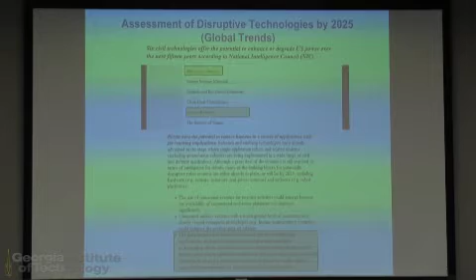I'm very excited about many things in robotics, but one of them is the reports from the National Intelligence Council that come every 5 years or so. This is a report from 2010 trying to predict the technologies in 2025, called Global Trends. At that time, there were 6 key technologies that could potentially disrupt the world, one of them being the extension of human life, biogerontechnology. There were also 3 on energy storage, clean coal technologies, biofuels, and so on.

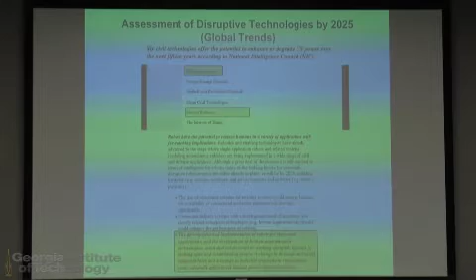But the 5th one was service robotics, in particular development and implementation of robots for elder care and human augmentation technologies, meaning robots could work alongside humans. At the same time, a change in social responsibilities and employment might occur and might be adverse to low-income workers. I think this is always the dilemma in robotics, and in any technology in general, of what the implications are going to be in the work environment. It's interesting that the Internet of Things was placed as number 6, which I'd say is nowadays more important than service robotics, but nonetheless still there.

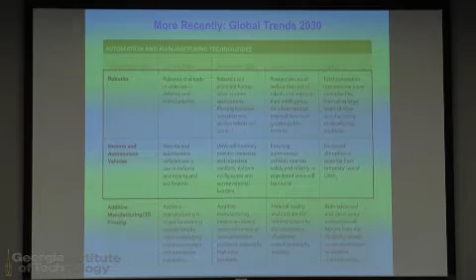This is a more recent report predicting 2030, with service robotics, manufacturing robotics, UAVs and UGVs here to stay and potentially disruptive if the FAA approves things. But we need to focus on reducing cost, increasing intelligence, and also being subject to the scrutiny of the public. That's very important, being sensitive about all of these issues.

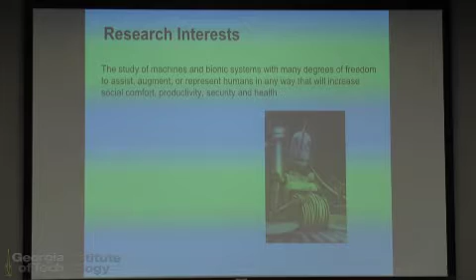...but we have these mobility problems after 70, 80, and 90, we really need to think about our lives and the lives of our children, what I'm calling 'after mobility.' What's going to be our life after mobility? I think robotics plays a very important role here. My personal research interests are the study of machines and bionic systems with many degrees of freedom, not necessarily in a humanoid form, any form, to assist, augment, or represent a human in any way that will increase comfort, productivity, security, and health.

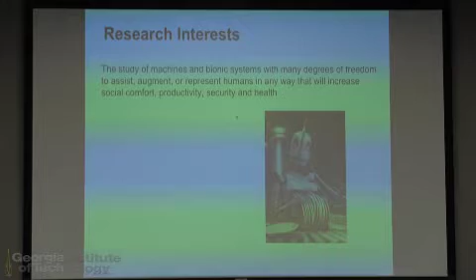This is really a way to say that robots will be blue-collar workers. Given that robotics doesn't have the metabolic requirements of humans, and perhaps we can utilize more energy and more resources, we might have more complex machines than humans, outperforming them in a physical sense.

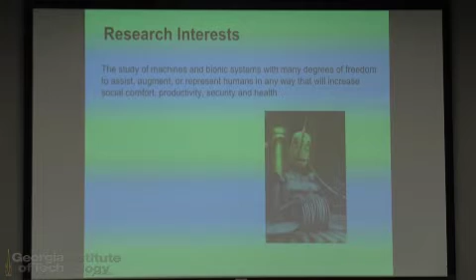Here we have such a machine, from the movie Robots, from 2005 or so. The robot has anthropomorphic degrees of freedom, but also has degrees of freedom inside. It's doing another task, washing dishes. I think that's what we're going to see: more redundancy, more mechanical complexity, and of course more smarts for the tasks that we need.

Feeling hopeful about those statements — if I knew I would succeed, borrowing a sentence from Astro Teller from Google, I would have Home Assistive Asimos. That was a view I had in 2009.

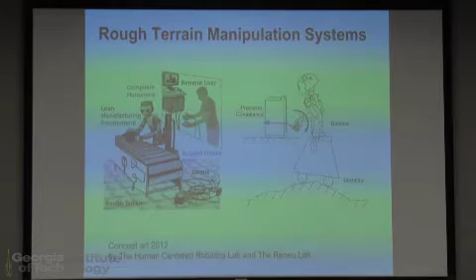I would have humanoid agile bipeds walking on alleys with children — that's a view I had in 2010. I would have rough terrain manipulation systems performing the kind of tasks they perform in factories, but now outdoors, dealing with all the uncertainty of outdoors.

I would have cloud-based humanoid laboratories where students could download applications for remote robotics, take data safely, gather it, and publish papers without having to build those systems themselves.

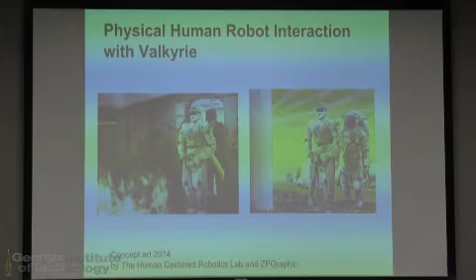I would have physical human-robot interactions with many Valkyries for firefighting and for astronaut work, and physical human-robot interaction in general. Overall, I would have robots just moving around and colliding happily with people without injuring them.

That's a more recent vision. The main thread to all of these things is the human-centeredness of these systems — the study of robotic systems for assistance and augmentation, what I call representation of humans for their comfort, productivity, security, and health, which is an elegant way to say that they should be blue-collar workers.

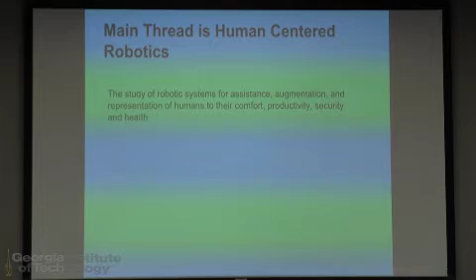So God knows what happened to Asimov's vision of crime detectives and civil rights advocates in robotics. So bring out the spirit, guys — from blue collar to advocates and detectives. That's a long haul. Within these kinds of visions, the ONR, Office of Naval Research, was the second entity to fund my laboratory.

But really the first substantial funding I got was back in 2011, so this grant is very significant for me. When I think about human-centered robots nowadays, my first reaction is to think about ONR and the Naval Research Laboratory and their great programs on predicting human movement, on grammars for planning, and so on, as well as mechanics and physical systems.

So if you are in these fields, these are phenomenal places to be. And there we play a role in the design as well as the controls of bipedal systems.

Let me give you some history of agile mobility. In particular, my interest is in speeds faster than 4 meters per second. Those have been achieved, but not as the regular mode of operation that robots at all times should perform at these speeds. I think it's a hard question to ask.

The motivation for those speeds is that humans tend to walk at 1 to 2 meters per second, but robots are there to, in a way, outperform our capabilities — doubling those speeds. In my opinion, we should be aiming for that, as well as being more metabolically efficient and lightweight.

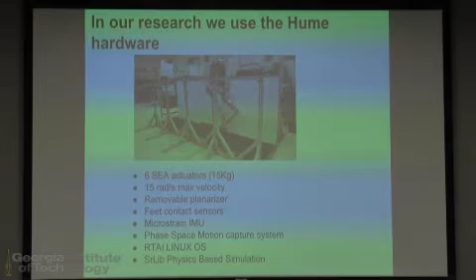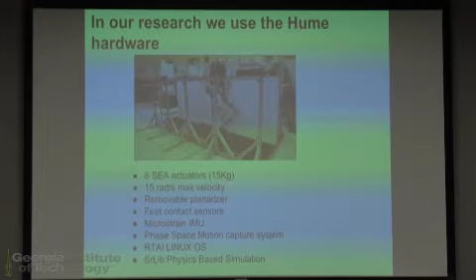In our research, we use the Hume hardware. It's a 6 degree of freedom, series elastic actuated robot, weighs 15 kilograms, fairly lightweight, can accomplish speeds up to 15 radians per second. We normally don't operate at these high speeds, and one of the reasons is because precision degrades, and point feet robots are already very sensitive to both precision and state estimation.

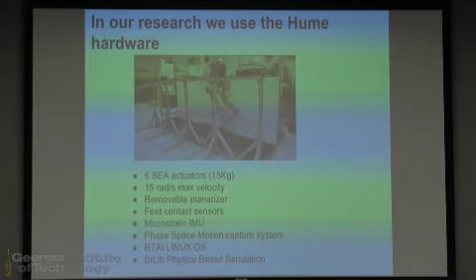We have a removable planarizer, so we are not confined to planar locomotion only. We have feet contact sensors for switching controllers and gains upon contact. We have a very low cost, bad decision in my opinion, microstrain IMU. We should have gone for the high performance one, but we augment the system with a phase-space motion capture system at 500 hertz. Obviously you suffer some occlusions and other things, so we have to do sensor fusion there.

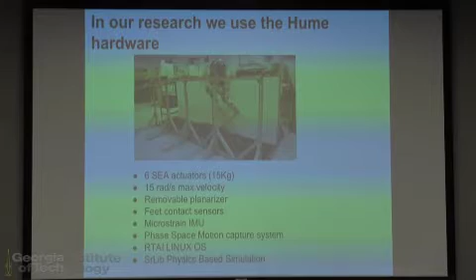We are based on Linux with a real-time kernel, and then we have simulations. The simulations are funny because a few years ago I thought I would never use simulations, and how important they are, obviously. We rely on prismatic inverted pendulum dynamics in order to allow rough terrain locomotion.

This means that we are not confined to a plane. We now can go in all directions in the vertical axis. If you assume that your robot is a point center of mass and a point foot connected with a prismatic body, you can derive the second order dynamics. It's a multivariate nonlinear differential equation here below.

Now, if you assume that you know the plane of locomotion moving up and down, then that can be simplified into a nonlinear ODE, and now it can be numerically solved. So given apex conditions, initial conditions, and known foot positions, now you can do forward and backward propagation and predict your progressive movement or your cyclic movement as you wish.

We exploited that at the beginning for our first attempts at dynamic locomotion into a concept we call the phase-space planner. The idea is to find the switching states between neighboring contacts. So let's take curve 1 and curve 2, given known apex conditions, the bounding conditions. The question is how to switch from the dynamics of curve 1 to curve 2.

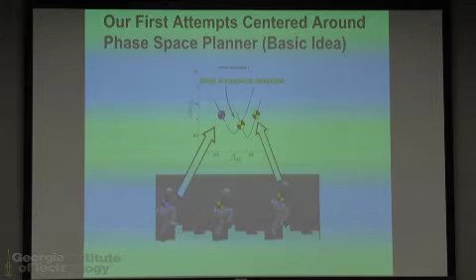The phase space, which you see here, the space of position and velocities in the center of mass domain, naturally yields this answer as the intersection between curves. Thus, locomotion emerges by switching at those points, at this particular point.

So a very simple, intuitive strategy works for just about any type of locomotion. That planner was derived a few years ago, and when we first published it, it had a relatively minor impact. The reason is we didn't have a system to implement it on. So my last few years have been spent really pushing the testing of these systems.

When we started testing these schemes, we found that fixing the foot positions meant the swinging speeds were variable, and variable swinging speeds mean different precisions. Because our controllers are very sensitive to precision, we decided to switch to a cousin controller, which we call the constant time to velocity reversal online replanning strategy.

Our strategy is to replan at every step so we can adjust for uncertainty. Foot positions are searched at every step such that zero velocity will be reached within a given set time. We start with a known state on the left or right-hand side at the bottom, and a known foot position, then we start lifting the foot. We plan the next switching state such that there will be a constant time to velocity reversal. We reverse velocity, coming back and forth at a constant time, so our swinging trajectories are always at the same speed.

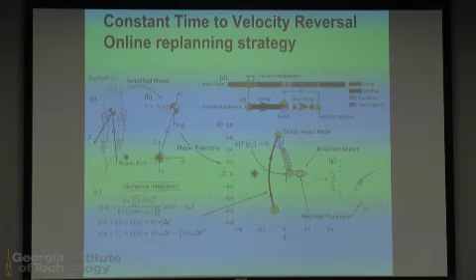That was proposed by my student, and it proved to be hugely successful, at least in simulation at the beginning. We implemented this in a Korean package called SRLib, a physics-based simulation. We also implemented whole body operational space control, which is a general purpose controller. As you can see, we enter a limit cycle with minimal drift. We have 3D locomotion here, this is untethered, and these are very good results, about a year old.

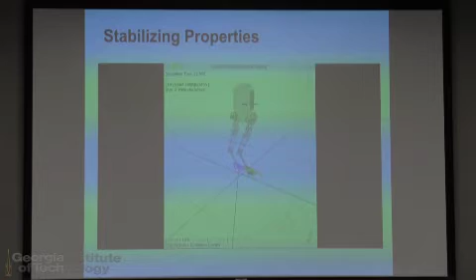Obviously the question now is how do we put these capabilities into a real system? We also started to study robustness.

Here we poke it - actually we simulate errors in the landing. So we are in this regime where we've planned this constant time to velocity reversal trajectory, but we force an error on the landing position, and that causes a progressive step. So when we lift the next foot, we are already planning the foot placement, the switching state, so that we will again have constant time to velocity reversal, and that allows us to re-enter a periodic cycle. Again, our focus is not actually on periodic cycles, but this emerges naturally.

The Y direction, the lateral direction, is planned in the same way, and it's robust in the same way. So it proved to be quite a robust strategy.

So we had the placement planning strategy, or an online robust replanning strategy. We were experts on whole body control. We had a robot, so I thought it was going to be a piece of cake - within six months we're going to have it.

But it proved to be wrong, and the reason is there's this whole other list of technologies we needed to develop in-house. We underestimated the need for body pose estimation, impedance control of the series elastic actuators, which is very hard when you have latencies, whole body control, and floating-base inverse dynamics, which I had used extensively in simulation but proved very difficult to implement on point-foot robots. Then there's switching contacts, the transition between sharp torques, which also required a different strategy.

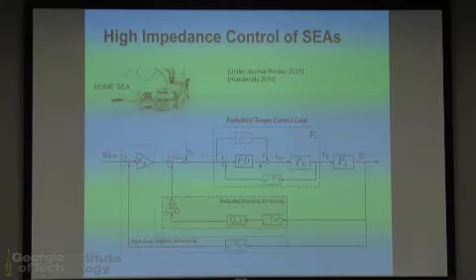This suffers from two problems. We imagine that the position servo is actually operational space control. It suffers from latencies from communication buses and latencies from the computation itself. It turns out that the velocity servo is extremely sensitive to latencies - anything beyond 1-2 milliseconds is going to produce instability. So you have to be very wary of these things.

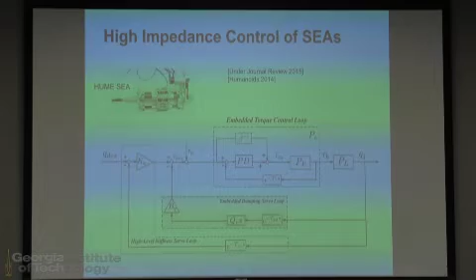The second thing is that the torque servo allows the actuator to perform as an ideal torque source, and therefore there is no natural passivity, no friction whatsoever. So the damping advantage you'd normally get from your position servos is gone, and everything has to rely on the velocity servos. But we said the velocity servos are pretty bad, so dealing with high impedance on SEAs is very, very difficult.

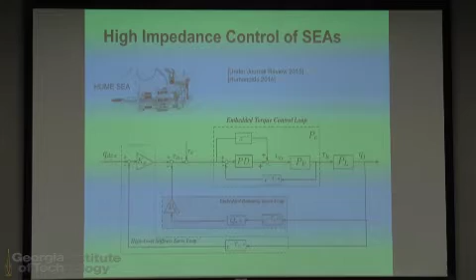On the other hand, they're great feed-forward controllers. If you have very good pose estimation, then you can relax much more your feedback controls and rely much more on feed-forward. But for that, you need very good pose estimation. So we have spent the last 6 months becoming good at pose estimation.

I have a student that uses phase space feedback. It's very easy to compute absolute orientation and position using a phase space system by minimizing the square error between the observed motion capture system and the known marker locations. You need to augment that with Kalman filters, including the IMU data. Some of the challenges we're dealing with currently are flickering markers or partial occlusions, and the complexity of the model for Kalman filters, but I think that within a week we're going to have very good velocity estimation.

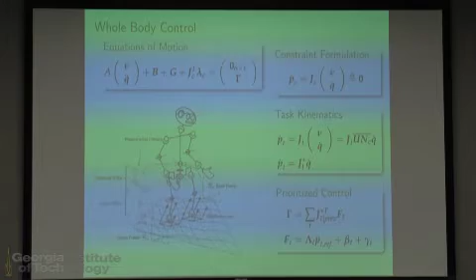Now, if I would restart this project, I would probably choose the KVH1750 IMU. It's a $17,000 IMU used in tactical operations, but also used by people like Jonathan Hurst and Grizzle. When you have these IMUs, you really don't have to do any major sensor fusion. You have it readily from the system because it's extremely precise, based on fiber optic gyros, very low noise accelerometers, and so on and so forth. So we are dealing with this additional hurdle, but on the other hand, I think we're going to have perhaps a publication in estimation, which is a great thing for us.

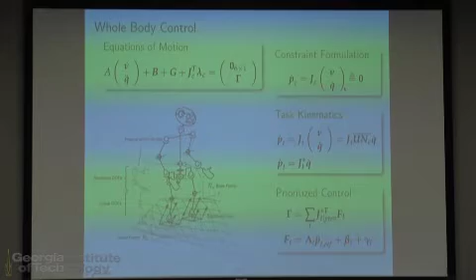Now, our real objective, or my personal real objective, is not so much locomotion, but whole body capabilities. In this sense, I utilize something that I developed during my thesis, floating base inverse dynamics, where we have floating degrees of freedom. We have also the contact forces, and then we can pose the problem with the natural constraints imposed by the contact. Something I developed for my thesis is these contact consistent Jacobians.

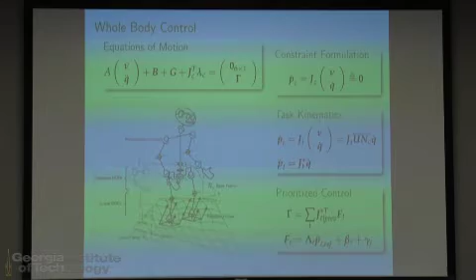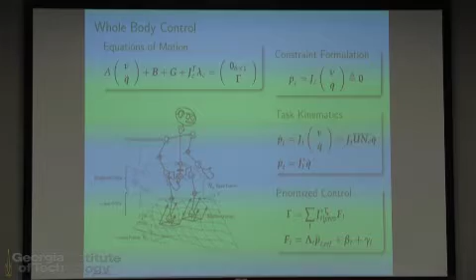They're consistent with conservation of momenta and also with the contacts, but at the end you're mapping actuated joint velocities to operational space objectives using these modified Jacobians, and this allows you to use plain vanilla operational space control, which is a well-known, model-based strategy, and you can do it unified. What is important about operational space control is that you can do unified forces and motions, and both of them are interesting for locomotion. Now, many people will ask, why do you need forces for locomotion? I will present the case pretty soon.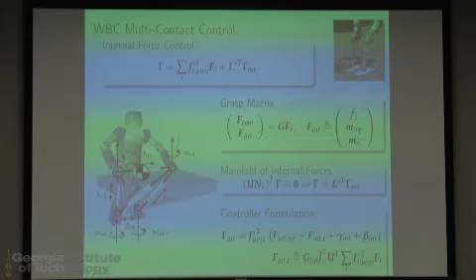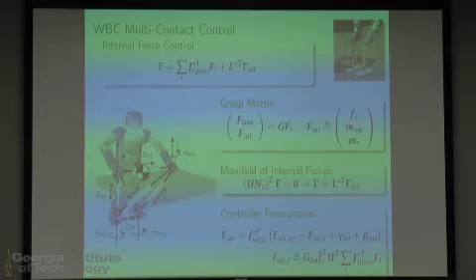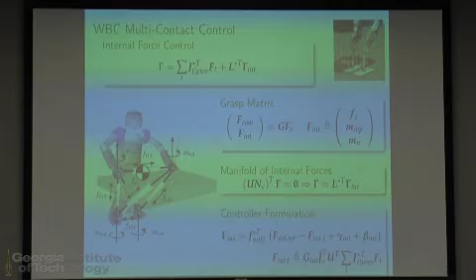I worked also during my postdoc on the force problem, recognizing that humanoids need to move, but also need to control the interaction with the environment. That was posed as a problem of finding the orthogonal space to accelerations. That torque space belongs to the internal forces, and it tells you about your grasp, but also your capabilities for acceleration and moving around. It's not the same to start cold and start running than having an additional contact and then producing a different type of mobility.

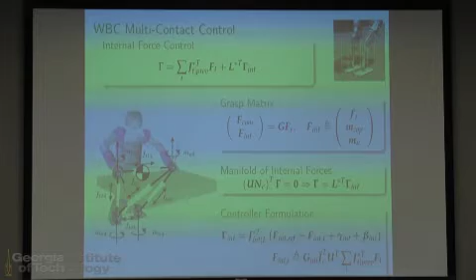So that research is on hold right now a little bit, basically because I have a little bit of opposition from my students. I don't know, maybe they find it hard, or what. But it's a great area to investigate: multi-contact agile locomotion.

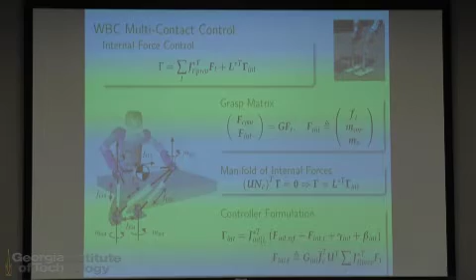So in there, another advantage is that you can do feedback control of the internal forces. You can compute this set of internal forces, and because it's a fully controllable set, you can do sensor readings of internal forces, and now you can achieve very accurate control with your environment.

So we took those ideas and produced a controller, we call it the whole body operational space controller for our bipedal systems. In here you might recognize operational space control, the weighted feed-forward matrices with gravity compensation, thanks to the pose estimation, and the Jacobian transpose projections.

Here we focus not only on the desired trajectories, but also on gain scheduling. Depending on your interaction with the environment, your gains have to be fundamentally different in order to adjust for changes in impedance. This is something very typical of these robots that change weight very, very quickly. So that's an augmentation of our control system with gain scheduling.

And here is the big novelty: the feedback of the desired internal forces, how precise you want to be with the environment. And then here, taking the torque sensor readings and projecting them as sensed internal forces, doing feedback, and achieving precisely your desired behavior with the environment.

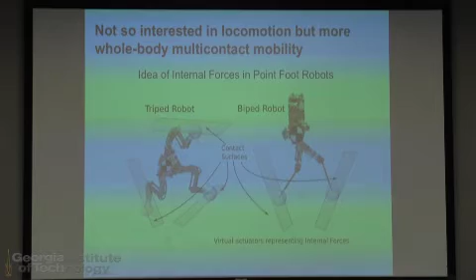Why do we need internal forces? Well, for all the types of locomotion, that planar locomotion, we are interested in this type of locomotion in any medium with any degrees of freedom. This is a robot that, if it gets funded, is going to be built. It's called Triskelion, and it is moving on these spaces very quickly.

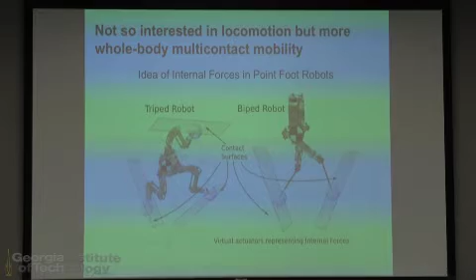And therefore it has to reason about these internal forces as well as the manifold of possible accelerations. So we have to control them very precisely. So these blue things are internal forces. And here, obviously, if you're doing this kind of spider type of walk, like you do in the American Ninja Warrior thing, right?

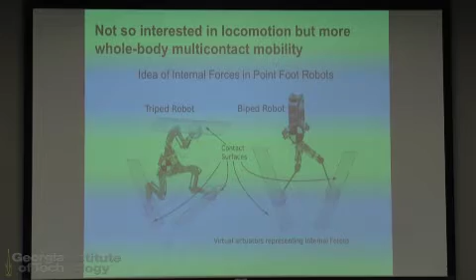This is where we're thinking we have to go, just for the sake of exploring every capability, because it was a great trait for adaptation from early humans, and because perhaps future rehabilitation systems will require people to go to the mountains and run with the kids and go to the trees, which is now not possible, and there those things play an important role.

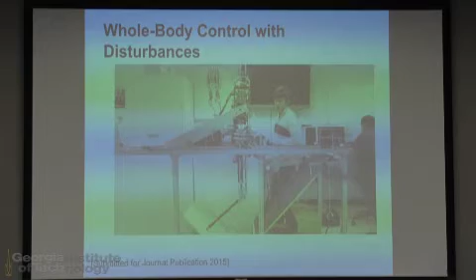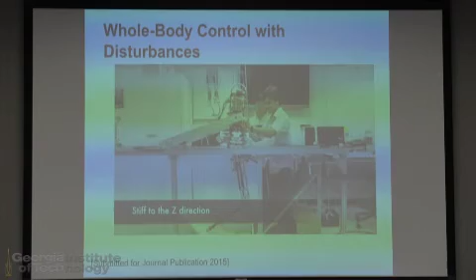So when we put these internal force controls together, with zero internal force control, right away it falls because the gravity is pushing it down, it's not compensated. But as soon as we increase it to 100 newtons, internal forces with feedback, now we can start performing complex trajectories on these environments, and we can be extremely robust through feedback to very, very hard disturbances, given the harshness of the environment.

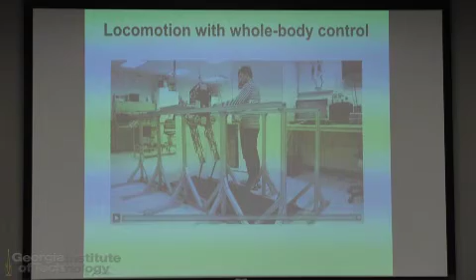So this is just a proof of concept, but we want to bring it farther. We want to be doing a spider walk, jumping, and so on and so forth. Now, our second interest is in locomotion. So these are results of about 2 months ago on the constant time to velocity reversal, planarized, and here responding to disturbances.

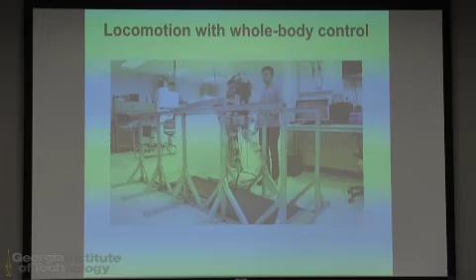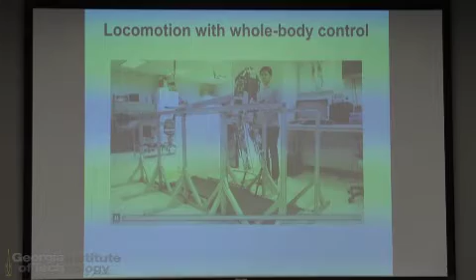What disturbances? Control precision, which we still are tuning a little bit, and also our pose estimation velocity is still not good enough. So it has this. But you can see it's a non-periodic thing. You can also see that the hanger went off to the point, and he didn't notice. So I'm not showing the end of the video, right? Because the robot just falls over.

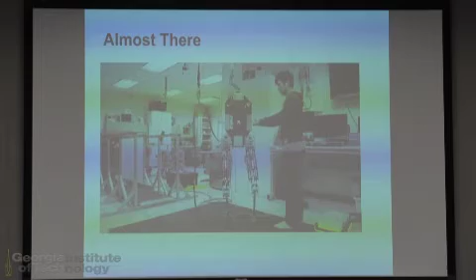So really, this is locomotion without tether. Now these are results of last week. This is trying to get to untethered locomotion. As you know, Atrias already fulfilled that capability last week. And we're trying to get there as well. Not so much competing with them because we're going into the whole body multi-contact thing.

And these results fresh from Valkyrie yesterday, where we are able to do already 3 steps, completely unsupported, still not quite there, and very quick. I agree. But I think that within 2 weeks we're going to be doing untethered locomotion, and that's very remarkable for me because I am a manipulation person. And I came to this field just a few years ago, and now I'm able to compete. I hope I can compete with the best of the best out there in a few years.

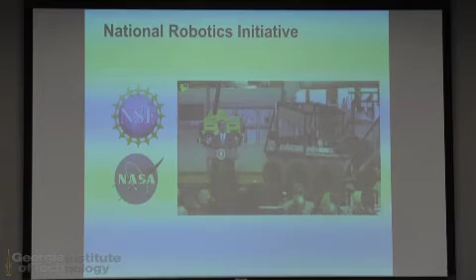Let's switch gears. We received an NRI in 2012, so thank you, Henrik. I mean, not that he played a role there, but thank you, NSF, and so on and so forth, for bringing this program here to the US. What we proposed is a precision outdoor industrial level mobile manipulator that could actually perform very accurate tasks in the sub-millimeter region, but now with all these disturbances. And it came back funded by NASA, and that was very interesting.

And we received a call, and they said, we're really interested in these technologies because it aligns with our plans of sending astronauts to Mars, building habitats, building instrumentation, and so on and so forth. So all money is welcome. And then we went on. This means also changing mentality because we were in the Willow Garage sort of mentality, and suddenly we had to change. But now we have embraced it, and we're really happy working for NASA.

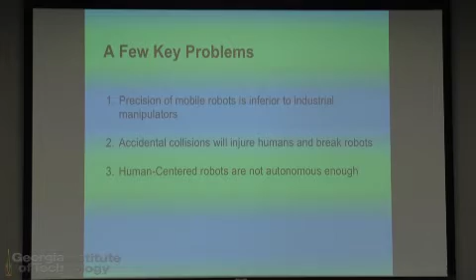Precision of mobile robots is inferior to industrial manipulators, in part because of the rigidity of the system. If you take a KUKA system, very rigid, and all of it is for minimizing flexibility of the system and achieving the accuracy. In part it is because of the odometry. So certainly those are important things. Accidental collisions will happen to these free roaming systems, so that has been a focus of ours. And then autonomy needs to happen, obviously. And then proper APIs and proper software need to be out there for achieving these capabilities.

This led to research of ours in 2012-13, published in RSS and Autonomous Robots, into rough terrain mobile manipulation. And for the rough terrain, the robot has to balance, so we started to implement these general purpose controllers, whole body control, in Dreamer, and created an API that could be used. The API was open source with help of Willow Garage, focusing on real-time performance, not quick, but very quick, and therefore we could have stability, redundancy as well, kinesthetic interaction.

And this is, you know, a proof of concept at the time that produced a couple of good publications out there. And then going into much rougher terrains and kind of imagining what happened if these guys would be out there, humans would be around.

Not shown here is that the robot at a certain point just jumped off the board and then it broke in 5 pieces. Right? So my son says, never show robots breaking, they will fire you. And I was like, no, I have to show it, right? So anyway, it also led to safety studies.

This is a little bit of ideas that we ran in 2011. There's a lot of studies in safety, by the way, but almost all of them focus on the upper body. So we decided to hit the lower body. We built educational systems, mobile bases. This undergrad project has been running for a while, funded by NASA. One thing that I said is that every student can handle a maximum of 3 degrees of freedom.

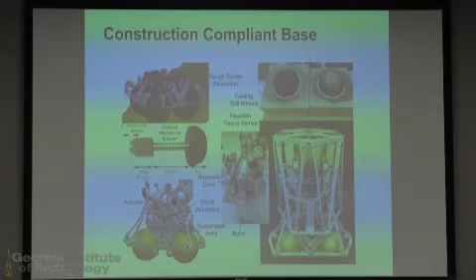Maybe I'm not ambitious enough, but this base has, instead of caster wheels, these ball wheels, can handle obstacles up to 2 inches, has a suspension system, but most importantly, it has a reaction torque sensor over here that measures the reaction torques on the wheels. And we hope that by triangulation, we can measure the forces in any place on the body. So we should be the first base that has whole body sensing, including the wheels, right? And this is without a skin.

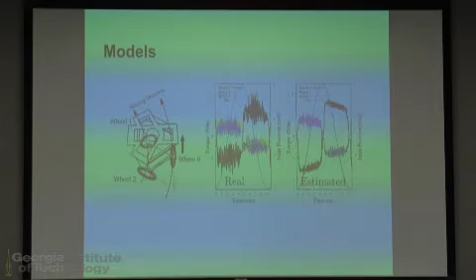If you want to accomplish these capabilities, you need to have a very good idea of what people are touching. And also you have to have a very good idea of what is an uncertainty or what is a certainty. What is a certainty is all the mechanical parameters. We augment our models with roller degrees of freedom. The roller degrees of freedom is not the wheel, it's the side rollers. And we estimate the friction, we measure it, and we fit a model.

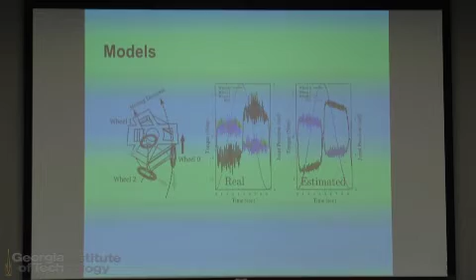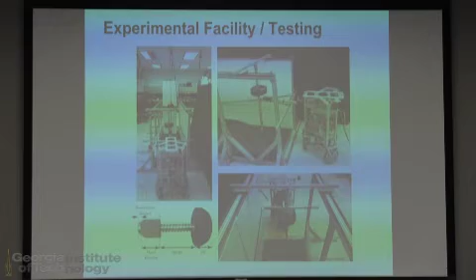And with that now, we can remove everything that is known and concentrate on triangulating and obtaining the external forces due to contact. With that, assuming a planar model of contact, we can now detect location, magnitude, and direction of the forces with a 20% error from any place, the wheels, the body, inside of the robot. We built an experimental facility where we can repeat the same forces or the same impulses when we hit the robot, and we had this educational base built by undergrads. Actually, this is the previous version, my apologies, over here.

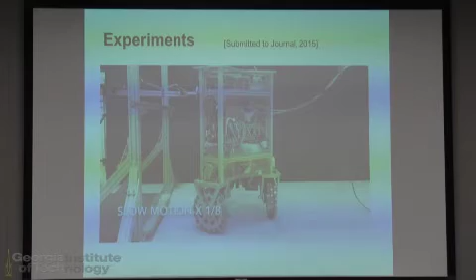And then we conducted this sort of academic study where the focus was on the reaction time. We believe that safety has to do with the reaction time. We have about 100 milliseconds of reaction. That's not good enough. In part it is because of the estimation process. In part it is because the gear trains, the harmonic drives, are relatively slow. They have time constants of 20, 30 milliseconds. The structure itself is not rigid enough.

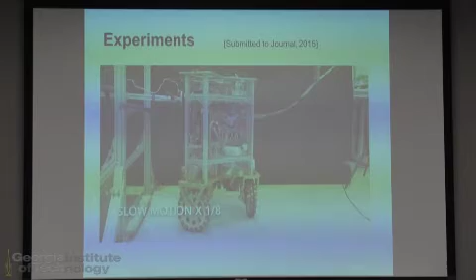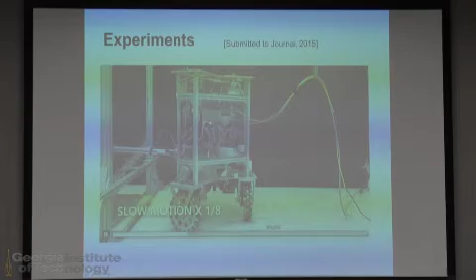So we want to start shooting for 2, 3 milliseconds reaction times. If your robot, you touch it and it just reacts with very low impedance, it must be a safe robot, right? Unless it hits somebody else on the other side, right? So we went into this study, which ultimately allowed robots to move around people, and to prove that it can sense contact on the hands, on the wheels. 50% of the collisions happen on the wheels, right?

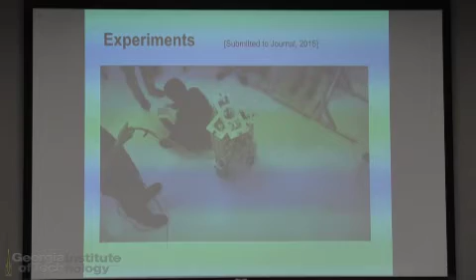So here I put my hand, which is a delicate part, and it's detecting the direction of the collision, magnitude, and orientation. And here, just a wire, right? So it's that sensitive, right? And here kind of envisioning, he gets hurt, right? But still, it's pretty low impedance, right? And people are happily reading in the park, and robots are colliding. Oh, how cute, right? So, yeah, he's always happy to volunteer for those things.

And here a little bit this proof of concept, we can touch it anywhere. This doesn't have a skin, so we advocate for not having a skin. Why? Because you're gonna have a skin on the wheel, and the wheel is responsible for 50% of the contacts, so we wanna have 100% safety. Oh, okay.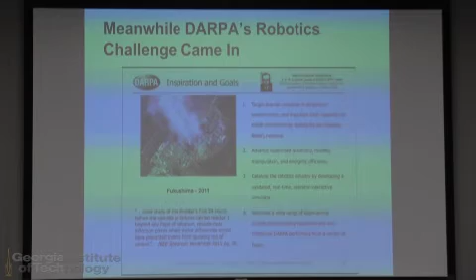We became very thoughtful. We had a very hard time on the DRC, as you guys know. We were incredibly ambitious. It's a full body, series elastic robot with a lot. It's over-designed, but on the other hand, we went along with the vision of NASA, which was kind of a biped instead of having something that was a quadruped, and with a lot more payload capabilities, more range of motion, and we paid the price.

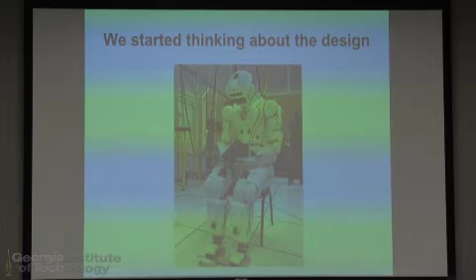But if you have seen the latest movies of Valkyrie, it's now in great shape. Actually, in a way, it's performing similar to Atlas, walking, balancing on one foot, and so on and so forth. But we didn't do well on the DRC, I must admit.

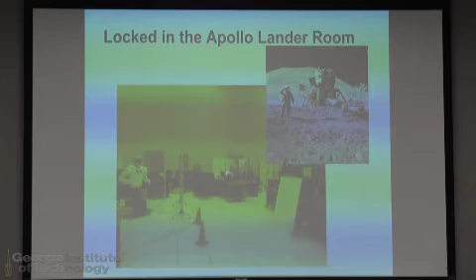We locked ourselves in the Apollo Lander room in Houston for 15 months. Actually, I had a pseudo leave of absence there. I was working until 5 a.m. myself every single day. Sometimes I would sleep in the car. It was harder than my PhD. But I knew that it was a historical thing for us.

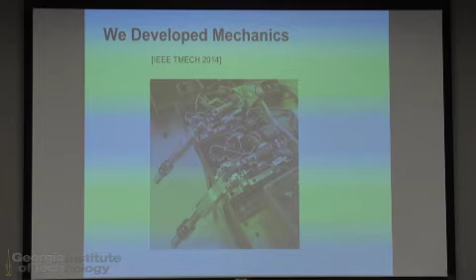We developed mechanics. This is work by my student Nick Paine, very talented. This was published in TMECH in 2014 and has subsequent publications. This was an enhancement. We thought that SEAs were all done, but he was poised to make it even better, in particular to achieve the performance of hydraulic actuators, that power density.

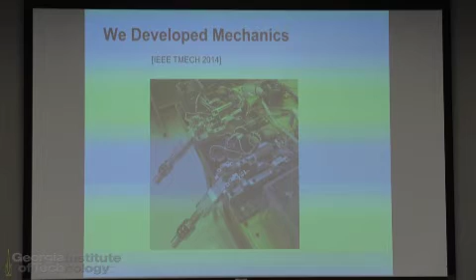So he focused on, rather than using the MIT style SEA, he reversed it, and rather than driving the ball screw, driving the ball nut, now the ball screw goes inside the actuator, and therefore there is a piston-like drive on the back. And also the spring is on the rear. And that allows us to make incredibly compact, incredibly lightweight actuators performing like hydraulic actuators. So these are 450 watts per kilogram.

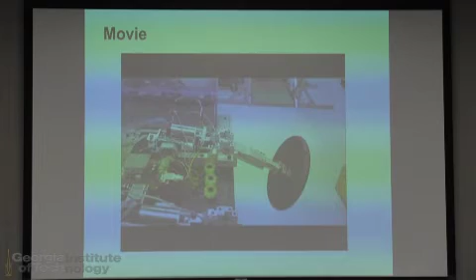Again, hydraulic performance, extremely fast, precise. As my student says, it can lift a bear, and it can sense a butterfly landing on the bear. Okay? So if you are not into mechanics, it must be hard for you to understand that, but this is really high, very high performance, right?

Moving on, well, as I play back, and if you pay attention, the spring here, the reverberations of the spring, and doing the measurements and the model-based controllers to achieve the desired precisions. This is very, very nice work of his.

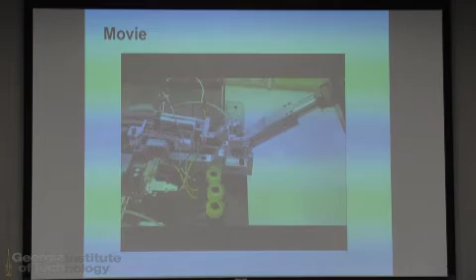Now, when he started developing this research, it was accepted outside without us publicizing it right away. We suddenly have China producing an industrial version. It is about now to become commercial. We don't know if it's going to have a market or not, but series elastic for the industry.

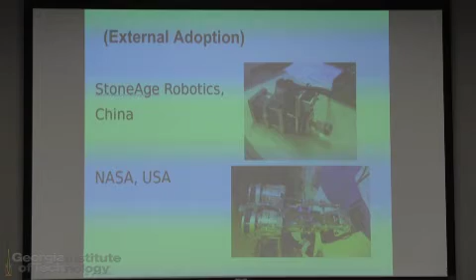NASA came in and developed the Valkyrie ankles, 4 of them, and then the 2 degrees of freedom of the chest, based on SEAs, even on UT SEAs. They even entertained making the entire robot using UT SEAs, so we played a very important role there. IHMC built their rehabilitation devices based on plain vanilla UT SEAs, with this research being published.

NASA and IHMC embedded those SEAs in the X1 Mina exoskeleton, now also under publication, for paraplegic individuals. And those came without us really publicizing. We're really happy. By the way, the university didn't allow us to patent this thing, so it's open source nowadays. Well, we're moving on now.

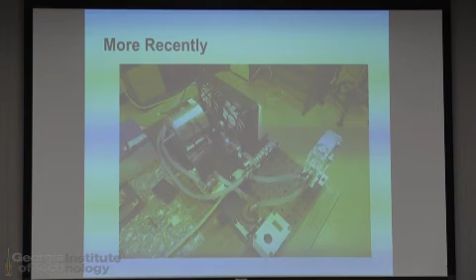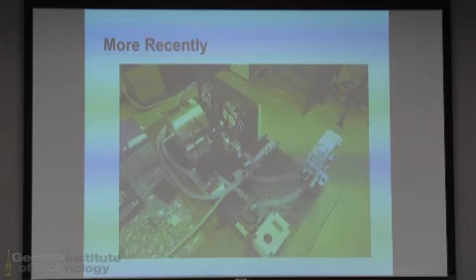We're moving to liquid cooled systems, low-cost liquid cooled, moving at $500 per actuator. We believe that future manufacturing systems, I was talking to Henrik, they will be $2,000, $3,000. And they will be extremely lightweight, extremely precise, and that can only, in my opinion, be achieved with liquid cooling technology. So we're building those things under Chinese funding, gearing also to commercializing.

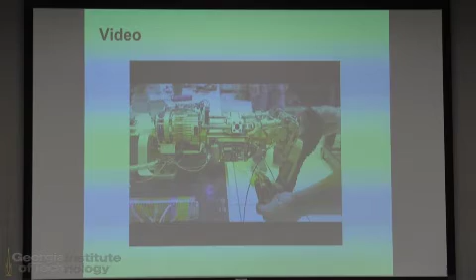So our involvement with Valkyrie over here, that's a video that my student put up. We spent there 15 months doing a lot of work on the rotary SEA actuators, the linear SEA actuators that were motivated by our actuators on the body, doing a lot of low-level control at the beginning. Here is the UT SEA transformed now into a NASA SEA. The same concept, doing a lot of testing, very good force control, obviously.

And on we went there, sleepless, doing force control, testing, more testing, and then ultimately we went to the competition, and we performed poorly. But we had phenomenal whole body operational space control on the upper body. Unfortunately, the legs were not working at the time, so we didn't have the ability of walking. Manipulation-wise, we were, in my opinion, one of the top teams.

Here, whole body operational control developed by NASA and us. And as you can see, a human is controlling the robot. So this is the API, the whole body control API, Cartesian, dealing with redundancy, connected to something called RTC, Robot Task Commander, which is an engine that allows you to connect controllers, let's say the control primitives, with the planners. And then also augmented by affordances.

And those affordances can be fit to the environment. And single-handed, she can perform this type of task. And now, in the last year and a half, we have been cleaning up this software. It is now finished, and has been submitted for publication.

Very originally, it's called ControlIt instead of MoveIt. I was opposed to the name, but my student absolutely wanted to call it ControlIt. It's a middleware for whole-body operational space control.

It supports Ubuntu 12.04, 14.04, ROS Hydro and Indigo, and Eigen 3 instead of Eigen 2. It has RBDL for rigid body dynamics, URDF robot descriptions, and ROS bindings and services.

So what are we waiting for? We're waiting for the release from NASA, which is a very important, difficult process. We're shooting for an LGPL V2 license, which is the only thing that UT accepts, not V3. I wanted to have it ready right away, but it's going to take some time.

I don't know what the adoption is going to be, but we're excited about it. For the future, we have a strict whole-body operational space control API, based on compound tasks which are the motion primitives, constraint sets which define the natural constraints of the environment, and also the actuation constraints and drivetrain constraints. We have whole-body controllers as well, and we're trying to move into supporting both WBOSC controllers and IK controllers.

It has a plug-in architecture and a multi-thread architecture as well, with a servo thread, model updater, and task updater, and it runs incredibly fast — ten times faster than our architecture two years ago. It can achieve 2 kilohertz, really 2 true kilohertz, with 30 degrees of freedom, which is good news for precision control and so on.

This is a video we submitted recently for publication of this middleware, showing a product assembly task. We are very oriented towards collaboration with this company on manufacturing. There is no visual servoing here, unfortunately — this is just utilizing the resources and the API and proving that it works very easily.

We're connecting to SMACH in ROS as well. Visual servoing is coming right away too. That's not where we come from, but we are being hard-pressed to perform at this level as well.

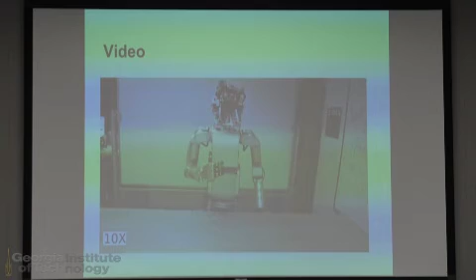Here we have the operation with redundancy. Redundancy is used for optimizing the reachability workspace, and that has to come naturally, so we want to have a kind of universal cost function that does it all. Potentially we could learn them as well — I think using stuff from Andrea would be a great thing, and so on. I think I'm done.